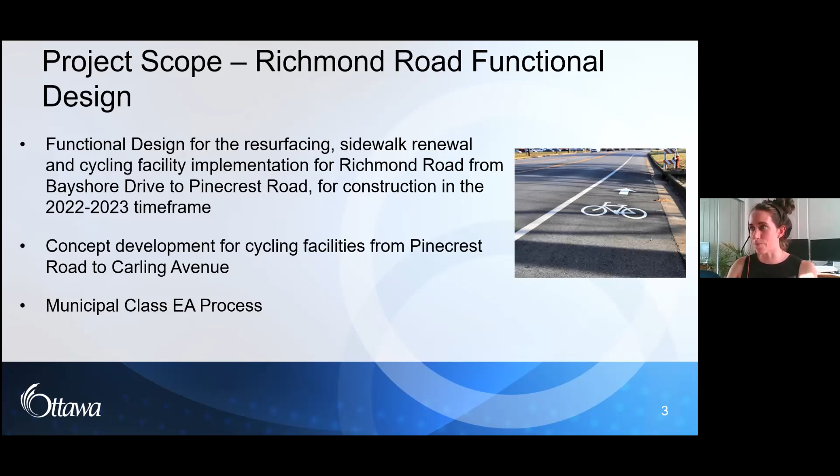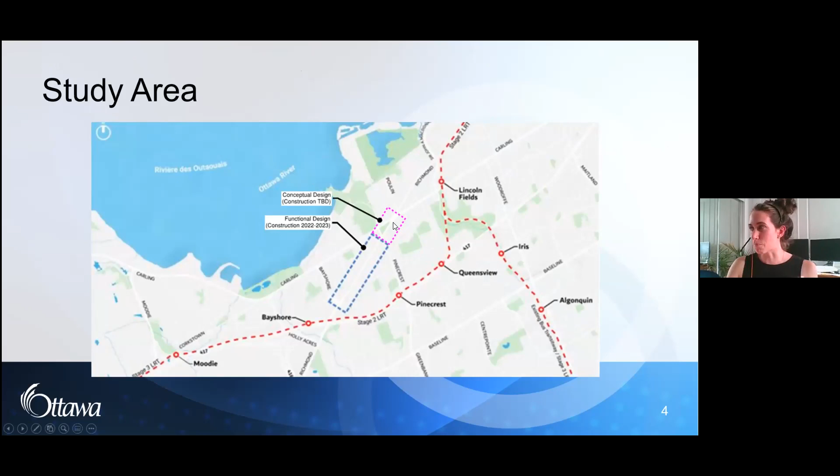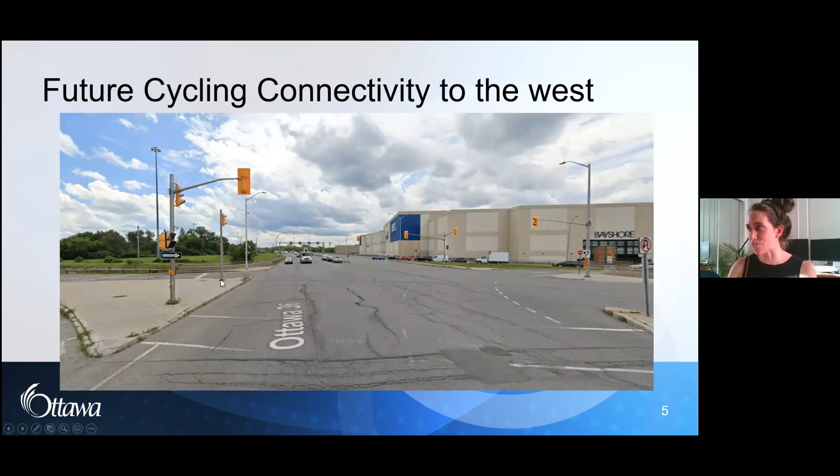Before we get into the functional design, I'll run you through some of the future cycling connectivity plans at both ends of the project. So here we have to the west, and here's a picture of the Bayshore and Richmond intersection. There are 4 future projects here that will tie into the cycling facility on Richmond Road. The first is plans for structural work and intersection modifications at Richmond Road and Bayshore Drive. The work here will include cross rides through the intersection.

Sorry, my mouse isn't working. The second is a MUP that will go from the Bayshore Shopping Center with access towards the LRT station as part of the stage 2 LRT work. And the third is a MUP going south of Richmond Road over Highway 417. The final one here is an extension of that MUP that will go south of Richmond Road all the way to John Sutherland, which is just west of the Queensway Carleton Hospital. The existing MUP that it will connect to there goes right to Baseline Road. So that last connection will be part of the Baseline BRT project.

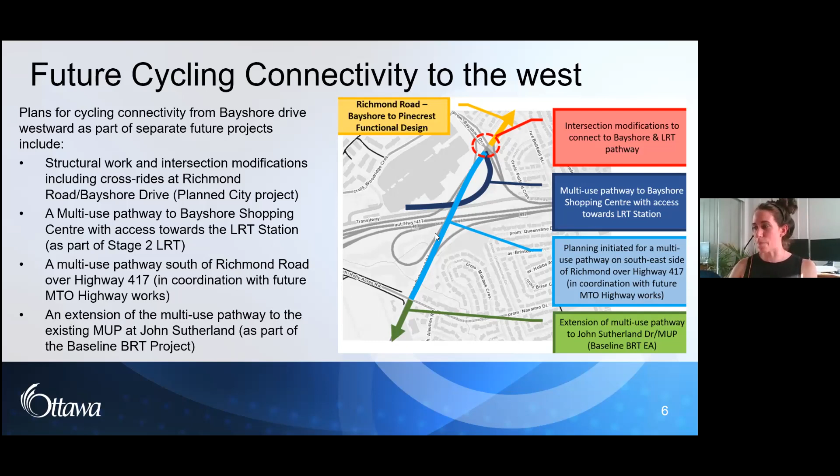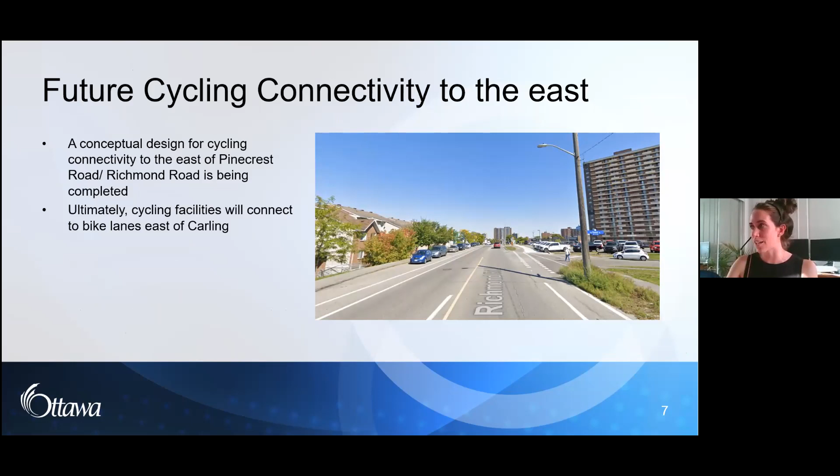Pardon me, I have a quick question. Richmond Road east of Pinecrest on Richmond Road up until, let's say, McEwen, could you just touch on how that's integrated, or is that another project?

Can you repeat that, I was trying to locate it in my head. So Richmond Road, the continuation, it looks like with everything with the LRT - Richmond Road coming from Westboro up to McEwen's to Pinecrest is being covered through a complete street program, and now we have Richmond Road starting from Pinecrest going west.

The corridor of Richmond Road between McEwen's and Pinecrest, is that being addressed in any other plan? I haven't seen anything that covers that so far, so we're not aware of a plan for that one. I know there has been some cycling improvements made between McEwen and Carling. I'm not sure, Amir or Megan, if you're able to speak to anything else you have in mind.

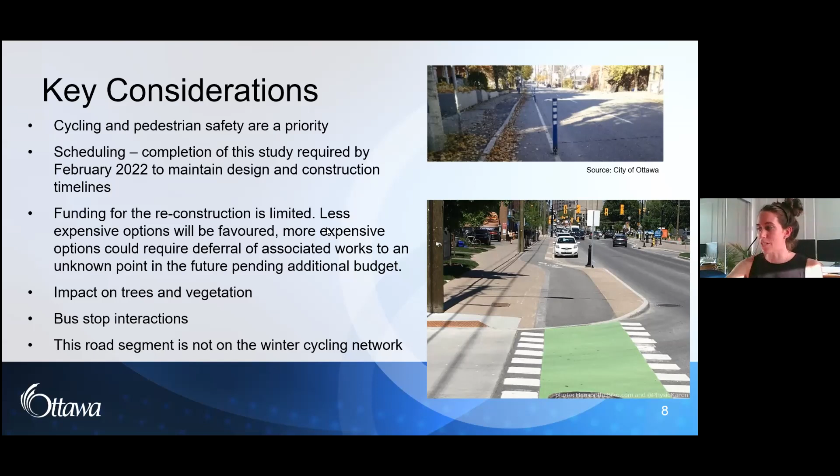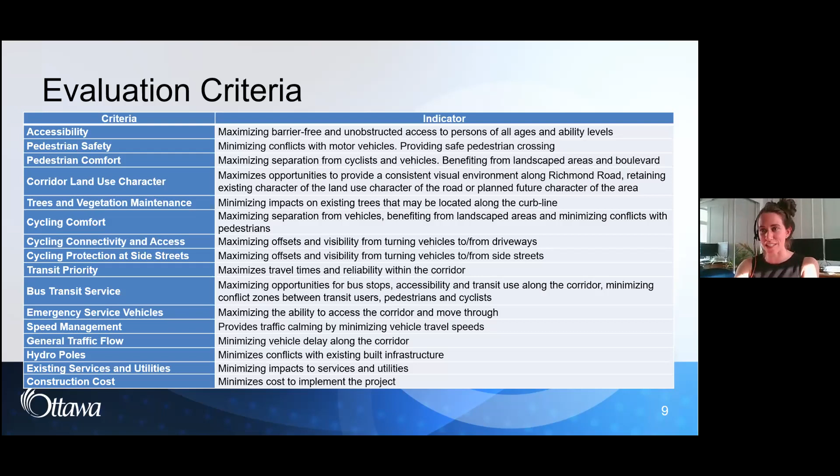And then here's some more evaluation criteria. So accessibility will be considered, and pedestrian safety, pedestrian comfort, corridor land use character, trees and vegetation maintenance, cycling comfort, cycling connectivity and access, cycling protection at side streets, transit priority, bus transit service, emergency service vehicles, speed management, general traffic flow, minimizing conflicts with hydro poles, as well as existing services and utilities, and construction costs.

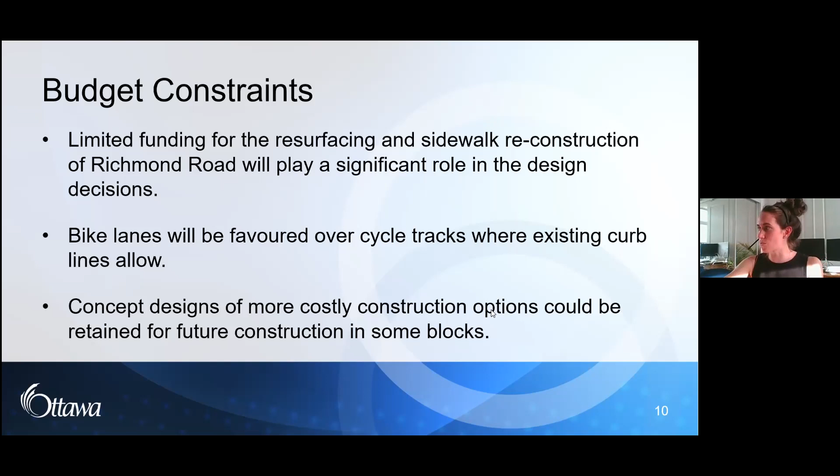So budget constraints, we touched on budget constraints before, but just to reiterate, the funding for the resurfacing and sidewalk reconstruction on Richmond Road is quite limited. So that will play a significant role in design decisions. Bike lanes will be favored over cycle tracks where the existing curb line allows it. However, some of the concept designs for some more costly construction options could be retained for future construction in some blocks. And now Chris will talk us through some design options.

Thanks, Erin. So we've picked cross sections at a number of points throughout the corridor just to discuss different options that we have. And these points were picked just kind of as representative of different sections of the corridor. When we're taking a look at them, we have a higher number, a little more fine-grained, but just to keep the presentation on track, we narrowed them down to 5 that are generally representative.

In terms of the design options that we're looking at to improve the cycling facilities, we're looking at buffered bike lanes and cycle tracks. In terms of options, those are the big considerations. We also have to keep the pedestrians in mind, of course, as well, but you'll see that all of our design options include some good quality pedestrian facilities. So that'll be common to everything that we look at.

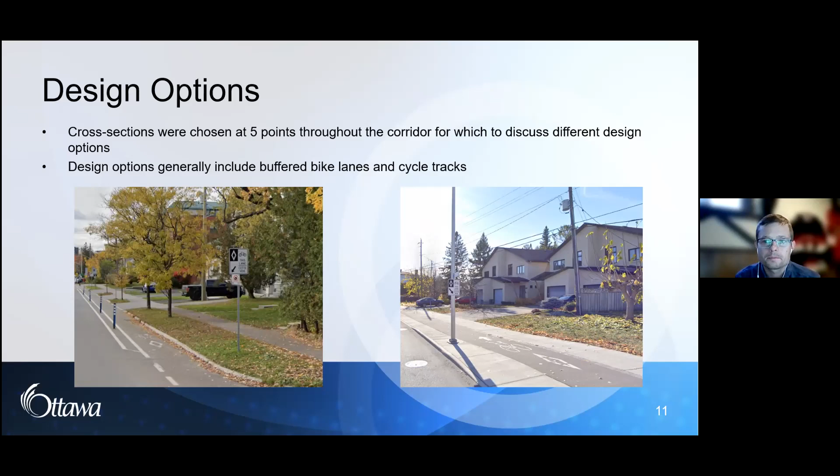So we'll start west of Bellfield. So this segment, this is near the intersection of Bayshore Drive. So it's 4 lanes. Off to the left, we have that small local street. As you can see right now, there's nothing for cycling facilities. The sidewalk's quite narrow, and there's a little bit of a maintenance strip in there.

So one of the options that we're looking at here, now this one's a little different. This section's a bit of an exception over those options that I mentioned earlier. So we are taking a look. One of the options that we're considering is a multi-use pathway along the south side. That would involve a grass boulevard where the street lights are, and we'd be building a 2-meter wide sidewalk on either side of the road. Next slide, please.

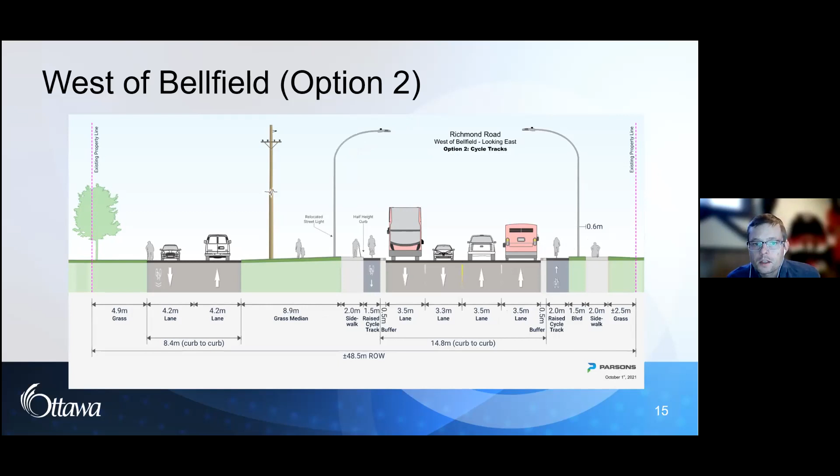So another option that we could take a look at here is we start narrowing some of the roads, shift the curb line in towards the center line of the road, and that gets us some space to build some cycle tracks. You'll see that because of the space constraints and the street lights there, it results in a bit of a narrower buffer than we'd always see, or than we'd like to see in an ideal situation with cycle tracks, but it is still providing some buffer. You'll also see on the right there that where possible, we're widening out the cycle track to give it a little more width.

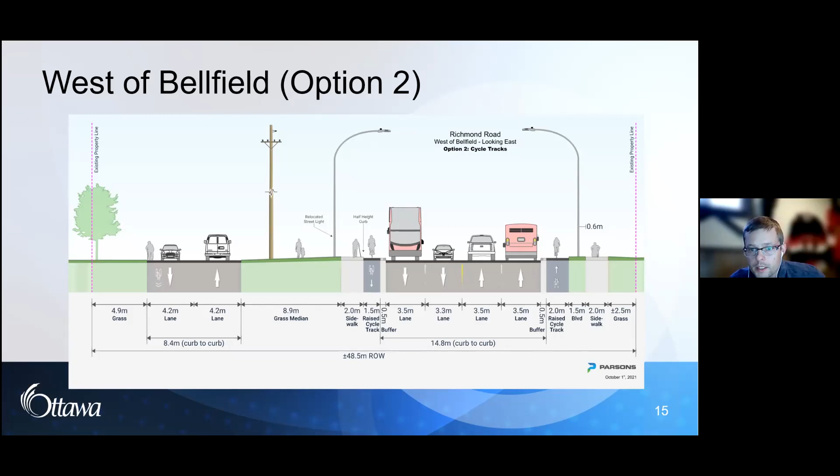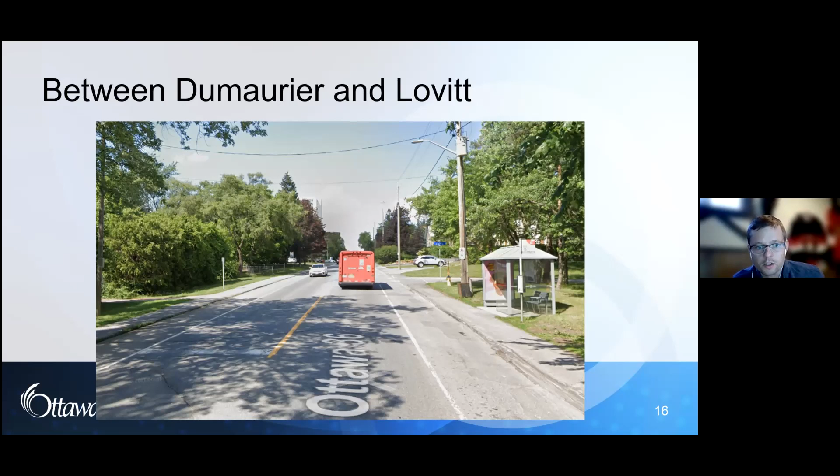So the next segment that we'll hop to, so we're moving to the east now. In here, it's getting a little more confined. We have just one lane in each direction. There are some shoulders paved on either side of the road, which do free up some space. And then those are those narrow asphalt sidewalks. They're not as bad in this segment, but in some other segments, they're a little more degraded and they almost blend into the shoulder visually. So for a car, it almost looks like one continuous asphalt surface.

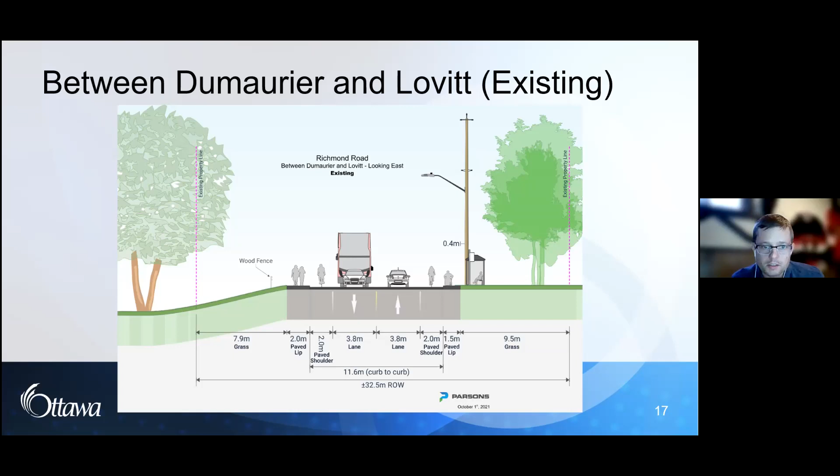So here's our depiction of the existing configuration in there. Now you'll see that while there's no specific cycling facilities, the paved shoulder does provide a bit of space, albeit not one that's very well protected from motorists.

One of the more cost-effective options we're looking at, keeping in mind the limited funds and how to maximize the benefit we can get, would be to put in a buffered bike lane. That lets us preserve the existing curb line. We'd still be putting in new sidewalks up to current standards, 2 meters wide with concrete surface. One big advantage is keeping the curb line where it is now, which saves costs related to the drainage system, catch basins, and the pipes that connect those into the sewers.

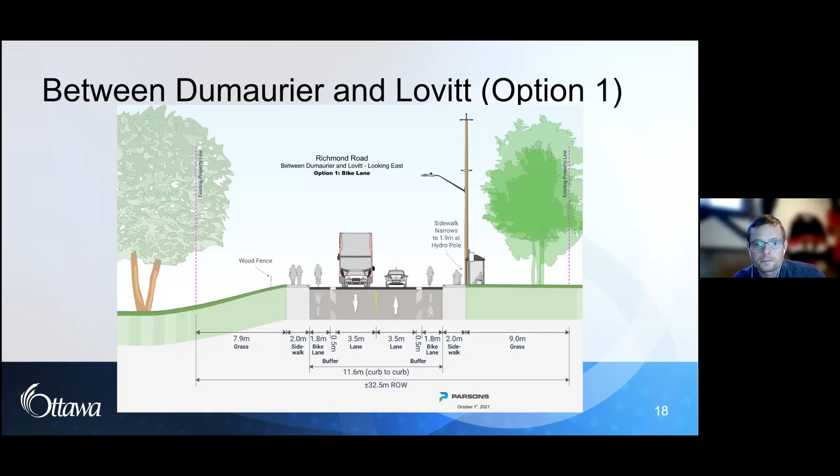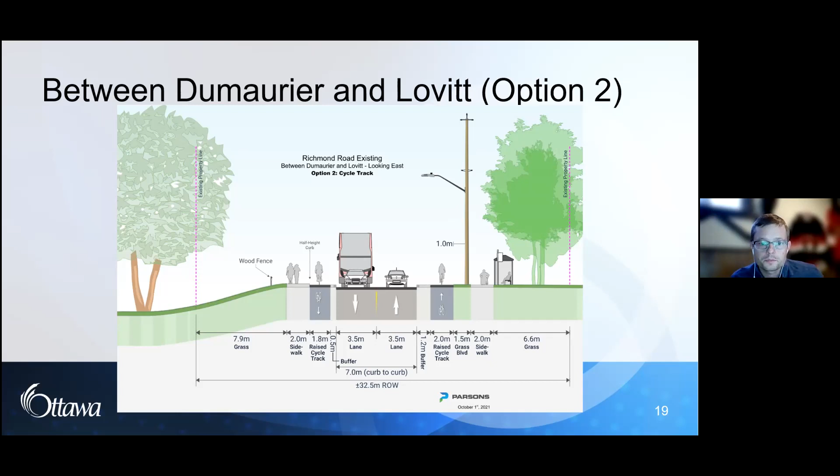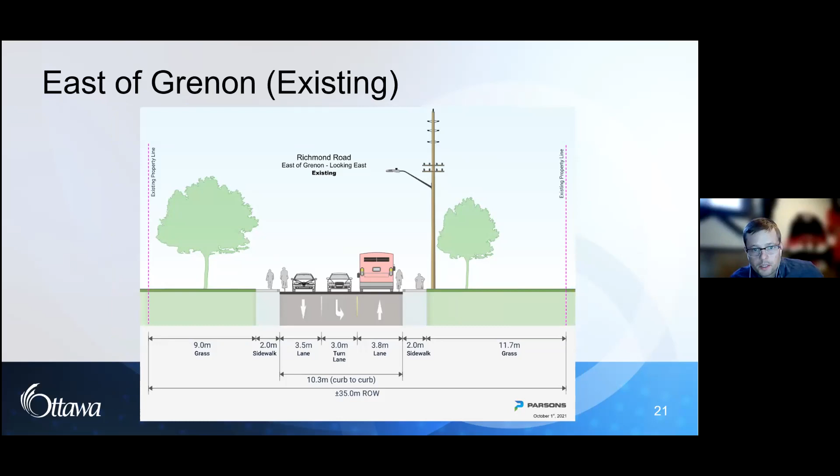Now we're going past the intersection of Grenon. At that intersection there are some raised curbs, a little bit of concrete sidewalk but not a ton, and the lanes here are a little tighter with not as much space to play with in the existing paved surface. This really highlights what we're facing here, as these curb lines keep things quite tight.

One thing worth mentioning is we did take a look at eliminating those left turn lanes. It's something we're still considering, but looking at the traffic volume numbers on the road, that's pretty problematic, so we're not sure whether it'll be possible. We are keeping space for them in the options we're presenting today.

This option shows what it would look like if we put in bike lanes. This is an interesting segment in that, with how tight everything is, adding the bike lanes ends up likely being more costly, because we'd be building out full depth heavy duty asphalt suitable for a road, and moving the curb line and catch basins out. Near Grenon it's different, since in the immediate vicinity of the intersection, cycle tracks are probably the less costly option.

The other thing to note here is we're getting closer to some trees on either side, so as we apply these options to the corridor, we have to be really careful of how close we're getting to those trees and what impacts we could have on them based on their size and health.

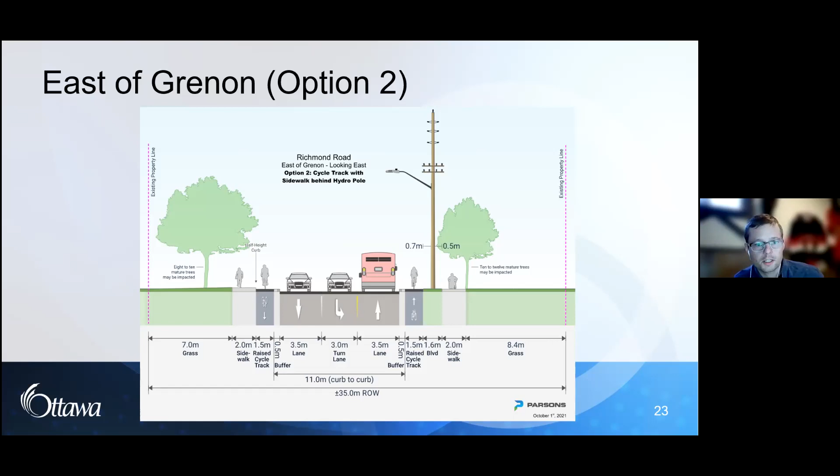This option is very similar - it's what it would look like if we raise up the cycle tracks. This keeps our curb line much closer to where it is today, and has the benefit that the asphalt for the cycle track can be much lighter duty than what we'd put in the roads, giving cost savings in this area. But again, similar to the other option, we are close to those trees, which is a pretty universal consideration for both options we're looking at here.

This takes us further east. You'll see that asphalt sidewalk coming back along with that shoulder. It looks the width of a parking lane, but there's no parking permitted here. We've already heard feedback, and there may be more helpful feedback today on what people are seeing out there, but we're hearing that drivers misuse that space and misuse the asphalt sidewalk. So there's definitely room for improvement here.

This is another look at the existing condition. You can see the road is a little asymmetrical with how it's painted - a really wide shoulder on one side with a narrower lane, and the other side has a wider lane and narrower shoulder. But the actual space on the asphalt is actually pretty close to being equal.

So this is another one of those segments where if we can hold the existing curb line, it may end up being more cost effective. And that is one of the big considerations as we start looking at how much to apply each of these options.

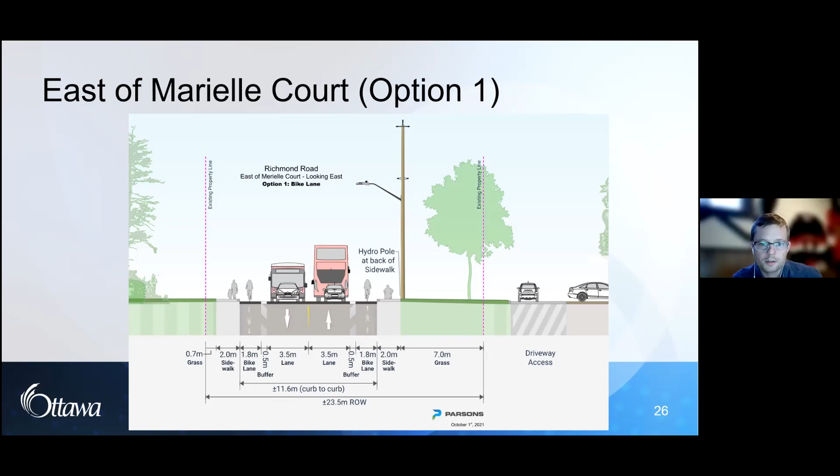And how to really maximize the benefit that we can get here. This one would put the back of the sidewalk at the hydro pole, but it does fit in.

So this is the version where we would see the cycle tracks raised up. There's a little bit more space here, so we can get wider cycle tracks than we were seeing in the previous option. You'll see that we are keeping an eye to trying to maximize the space here, give that extra width on the cycle tracks where we can, hopefully allowing for some passing.

We've also heard feedback on other projects that there's a bit of a preference to widen the cycle track surface before we widen the buffer, because a cyclist can operate further from the travel lane if that's more comfortable to them, but having that extra asphalt surface helps for passing where that's needed.

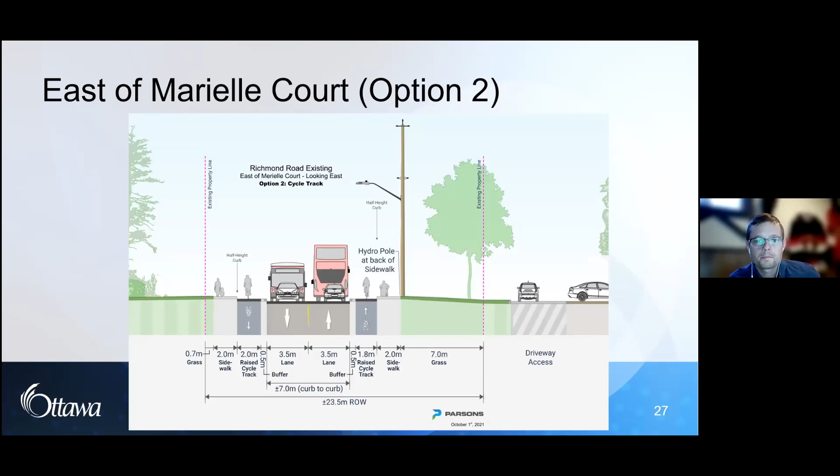And then this takes us to High Street. So we're almost at Pinecrest here. So this is what it looks like today.

So we're starting to develop some turning lanes. We're splitting back out to 2 lanes in each direction to prepare for the intersection with Pinecrest. You'll also see a bit of a painted buffer developing in the middle, to split out traffic for the concrete median for the intersection.

One thing to note is that we're getting a lot tighter on space on both sides. On the north side, that's on the left of the drawing there, there's not much space behind the sidewalk before we're at the existing property line. And then on the south side over to the right, there is some space behind the hydro poles, but then we're right into those trees there, which is something that would need to be kept in mind.

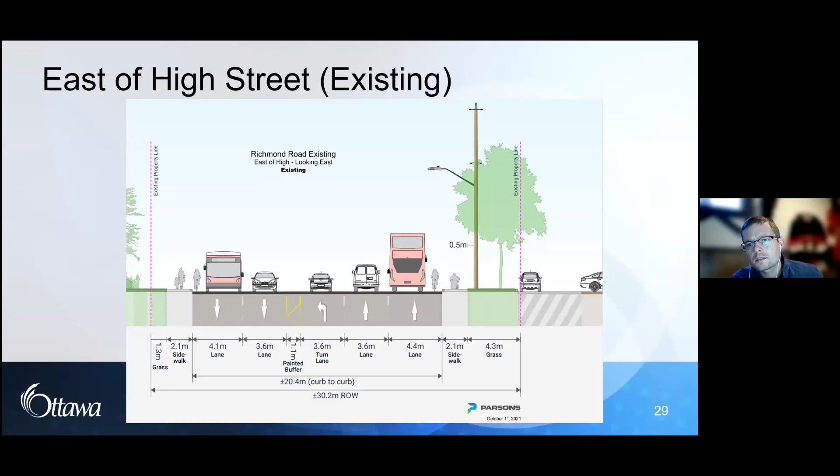This project's only going to Pinecrest, so we have to think of some of the interim termination strategies, how we would develop the cycle track or bike lane heading in the westbound direction. So as that second lane disappears, how we would let cyclists out in a safe way that's also not confusing to the motorists that need to merge over.

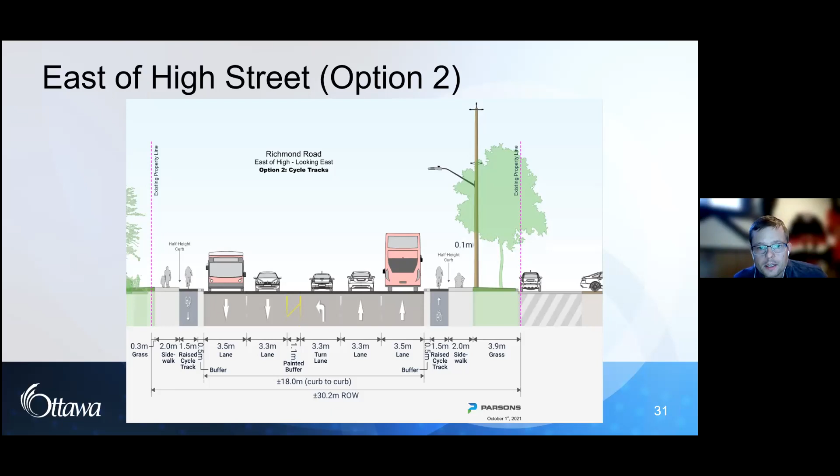And then similar in the opposite direction as we're heading eastbound, how do we get those cyclists down to the road and get them mixed into traffic, which is not ideal, but in the interim, there has to be some kind of continuation until the funding's there to continue with a protected intersection at Pinecrest and keep heading further east.

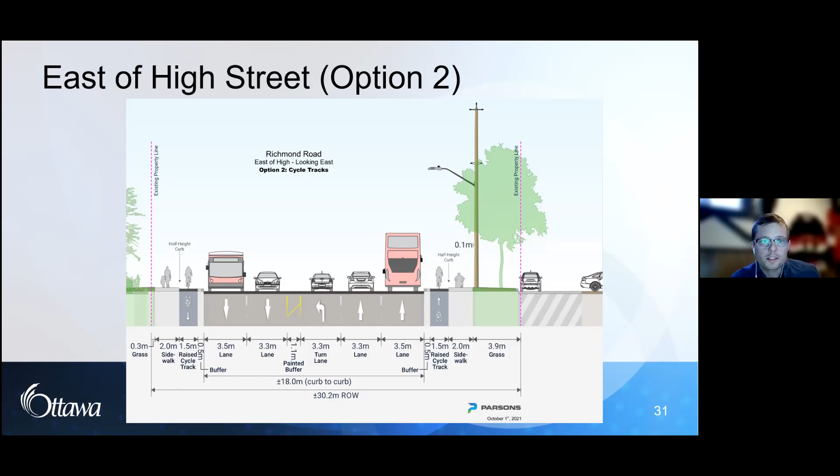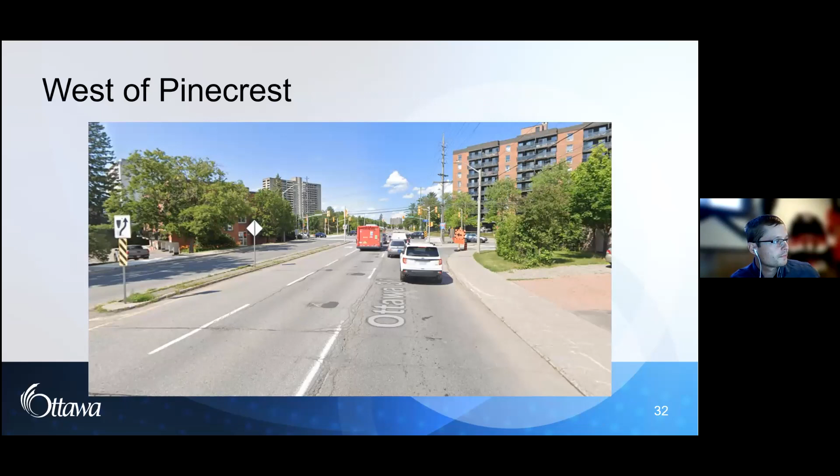So I think that takes us to the roundtable discussion slide. Yeah, oh, here we go. Yeah, that was the one.

So sorry, Aaron, can you hop back to the previous slide? I just want to make sure I didn't miss any of those tie-in talking points.

Yeah, so we're looking to continue the protected cycling facility as it connects to the existing roadway. So as I mentioned, we'll have a close eye to that detail of how we're going to get cyclists down back onto the road. And we're definitely going to have, I know they're not the greatest, but painted sharrows and other signs for motorists just to really emphasize to expect these cyclists. And then cyclists will also have the option where the cycle track ends, they'll be directly adjacent to the sidewalk, so those who choose can dismount and walk if they're more comfortable with that option.

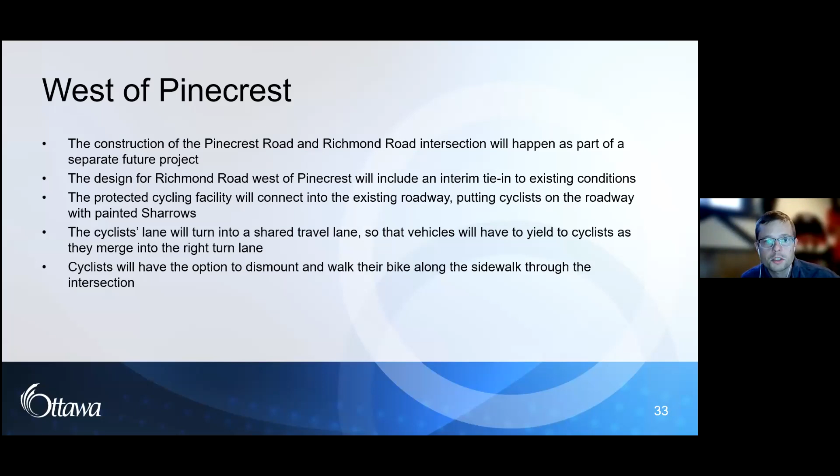So that takes us to the roundtable discussion. I'll open the floor for comments and questions. Thank you. I'll also be keeping notes off to the left here, so if you see me typing, that's just to keep track of what everyone's saying.

Thank you, Chris. I see Stephen's had his hand up for a while. Stephen St. Denis.